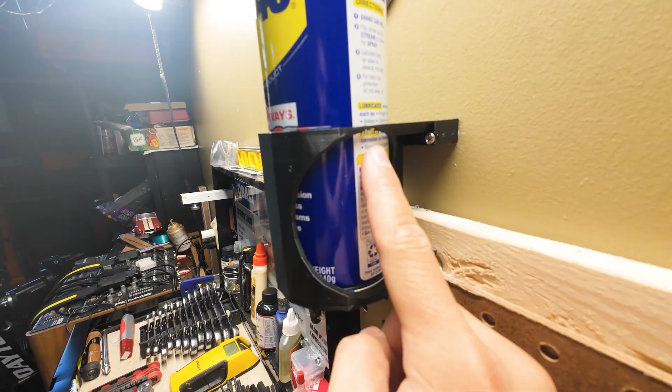Problem number one that I talked about in the last video: look at all this space taken up by all these bottles. So I made prototype one of a cup holder, but it's very thin, and I think it's going to break one day. Also these screws are too big for the holes. So I need to make the holes bigger, make this support bigger, and probably change the design. That's what we're going to do for prototype 2 of this cup holder to hold the other WD-40 bottle.

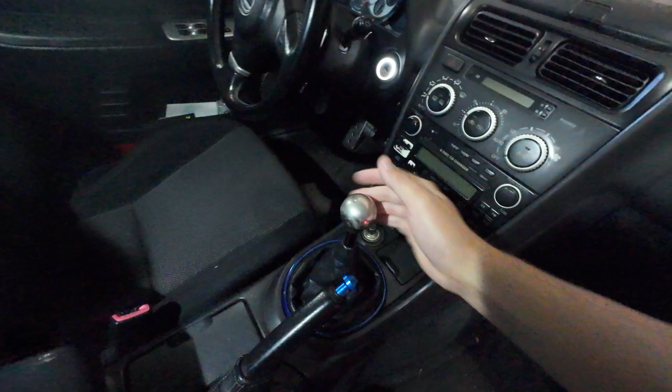And then I had an idea. This is a water bottle that's essentially a cup holder. What problem do I have on my car? If you don't know, when you're driving a manual car, having cups with straws right here is horrible when shifting - it gets in the way, hits your hand. So what if I could get that cup holder and put it right here? This would be ideal, this would be perfect.

I know some of y'all are saying, why don't you just put it on the vents? Those look stupid in my opinion. I want the vents blowing on me, not on water.

It just shakes around. So I was thinking, how can I design something that either hooks on top and holds it, or hooks on bottom? Option A, it hooks on top and goes in between that. But I don't like that idea because you'd have to change this part right here, like drill it or something.

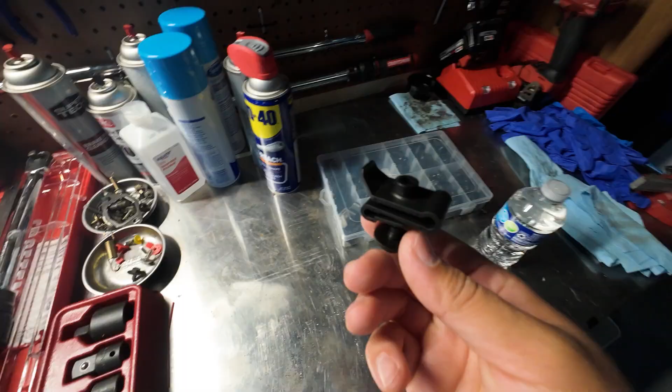So how about you hook something on the bottom, drill it, and then slide the cup holder on right here. If you don't know what this is, this goes in between the under panel and the bottom side of the bumper. This screw will sandwich these two things together and hold everything in place, okay?

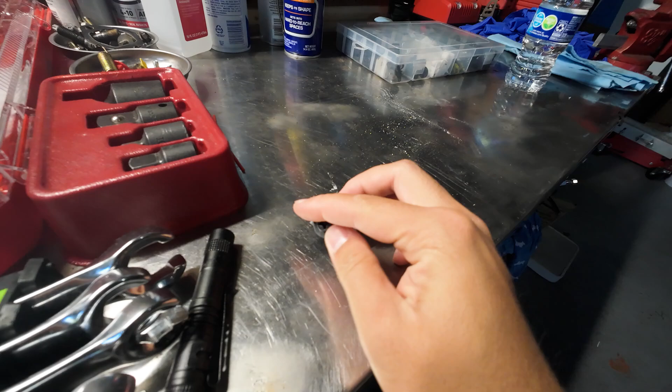So hear me out, let me fiddle with this. Let's go to the inside of the car. If I could somehow design something like this that goes underneath this right here and then screws in, and the cup holder can sit on top of it and lock in here, that would be perfect. Because then if I have a passenger, I could just slide the cup holder off.

Also, if you didn't know, IS300s come with 4 cup holders. In the back there's also another 2. So if this prototype cup holder for my car version 1 fails, I always have 2 cup holders in the way and 2 cup holders in the back that do the trick. That do the trick? That do the trick. I don't know, English is hard.

All right, let's go upstairs and let's CAD up some cup holders.

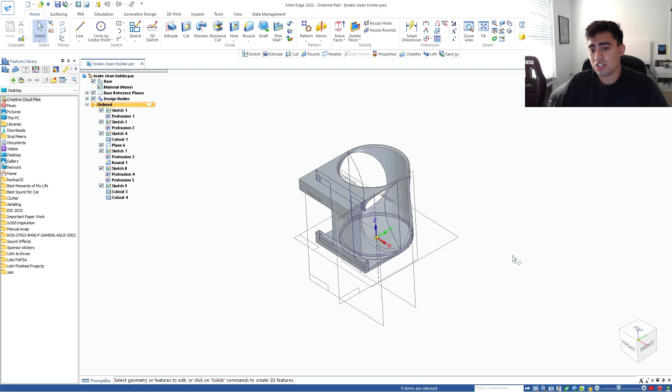All right, so we're back on CAD. All the measurements are still there from the last time we designed this. I showed y'all a time lapse of me designing this, which wasn't the best - I thought I liked time lapses, but it didn't really show the process.

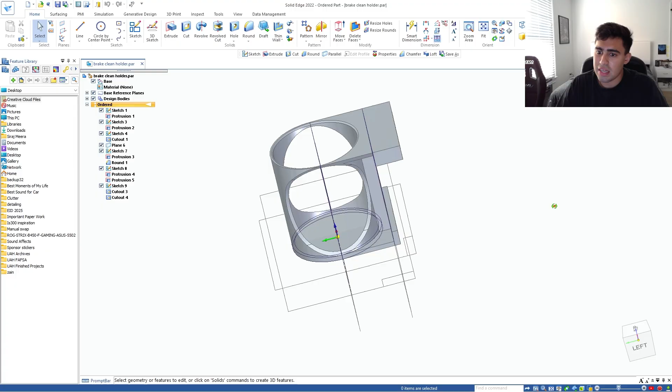So basically I started with a circle, extruded it into a basic cylinder, cut holes here, cut a hole straight through it, and then designed a backing plate right here. On this right side, that's where it attaches to the wall. I just extruded it until it meshed into the actual cylinder.

First step, let's fix this little wall thing. So what sketch is that? All right, let's adjust this sketch.

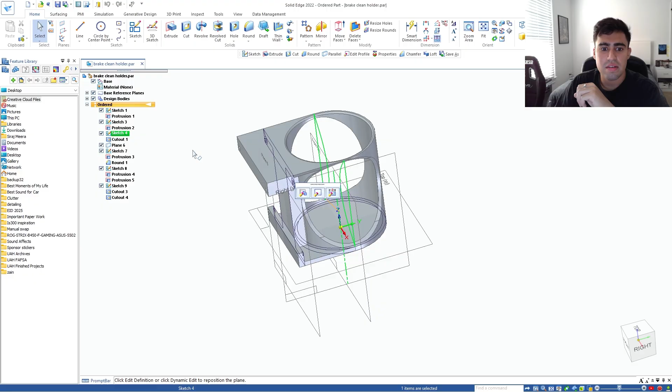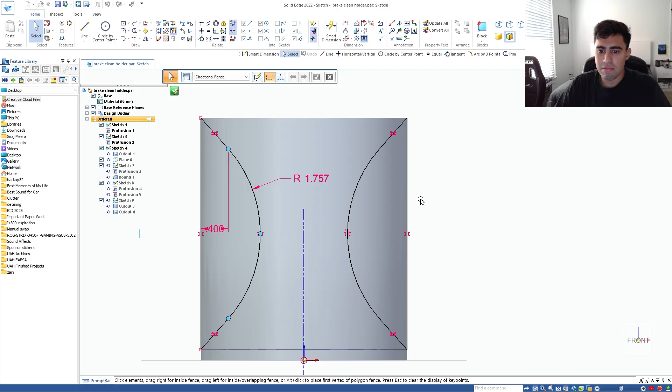Many of y'all probably haven't seen SolidWorks or Solid Edge, so I don't know what to tell you except I'm going to try to explain it to the best of my ability, and hopefully it's not as complicated anymore. CAD might seem very jarring, but it's just drawing, and then drawing in 3D.

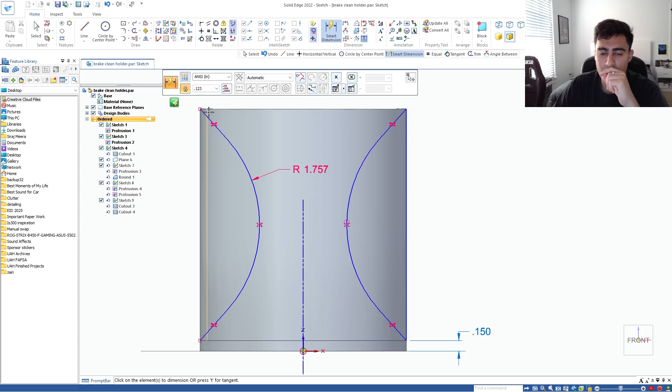Let's delete this and then measure from here to here. That's 0.15. Therefore, I want this and this to be the same width, if that makes sense. So I'm going to put this right here, and then right here, and do the distance to 0.15.

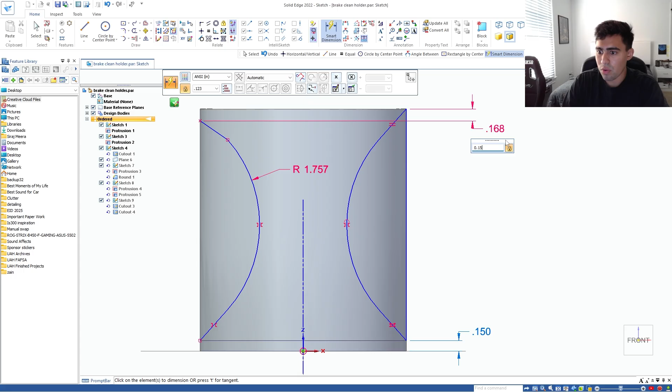Now I could time lapse this for you so you could see the entire thinking process and basically see what I'm doing, instead of seeing a camera behind a monitor that's overly bright. So yeah, let me time lapse this for y'all.

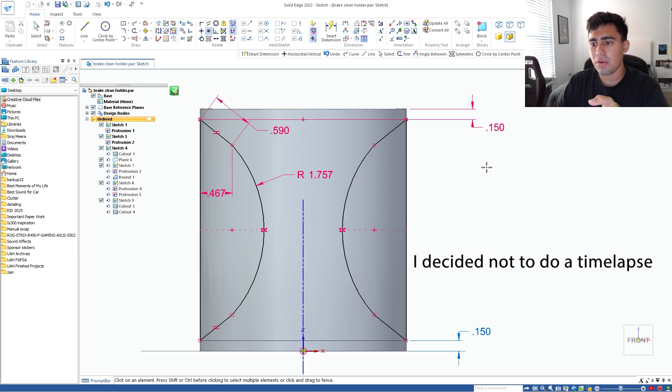All right, so that's basically it. Let's see if it adjusts the hole. It probably messed it up because I deleted some members, or not. So let's see.

Finish. Yep, protrusion number—ooh, it messes up everything, basically everything. So that's fine, you just delete this protrusion.

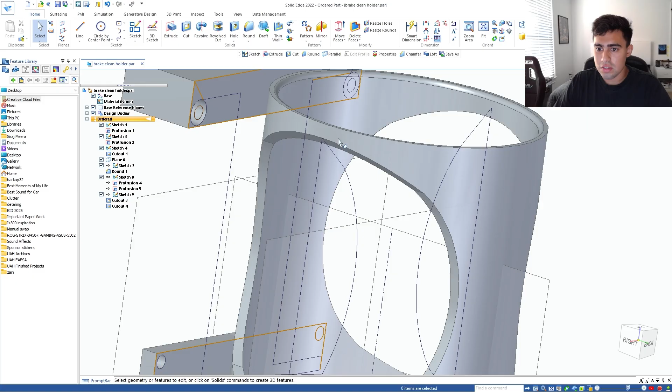And then the holes are a lot better, because look, you see this? This is thicker, this is thicker, all of these are thicker. So let me remove some planes for y'all so you can see it. If you can't tell, I'm from Alabama, I say y'all a bunch.

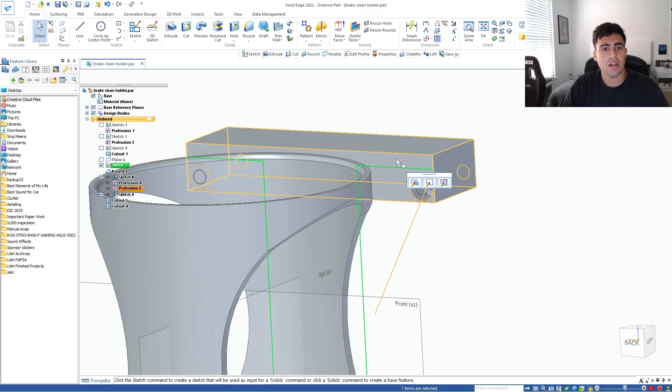As you can see, the green sketch is now both square, if that makes sense—like all these are squares. The last time it was like a triangle, it was just a weird structure that I made.

But now I'm gonna extrude this sketch this way. But I don't want it to go through, so I'm just gonna... through all, but that doesn't work. Through all? I don't think so.

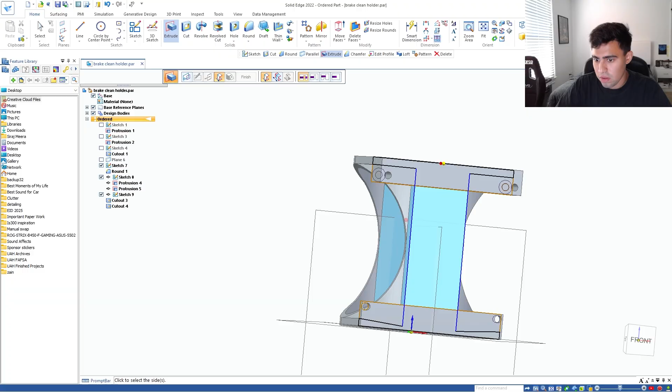Let's try this. There you go, look at that. Perfect, look at that, beautiful. Let me remove that sketch now. Beautiful, look how simple that is now.

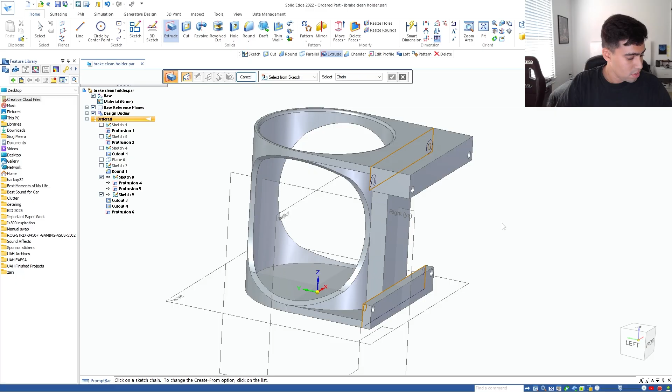All right, this print's going to take 4 hours, and it's already 5:14, so this video might come out late. But I also need to design the other one.

So the problem with the holes is that the holes were way too tiny. So I'm going to cancel this sketch. Extrude.

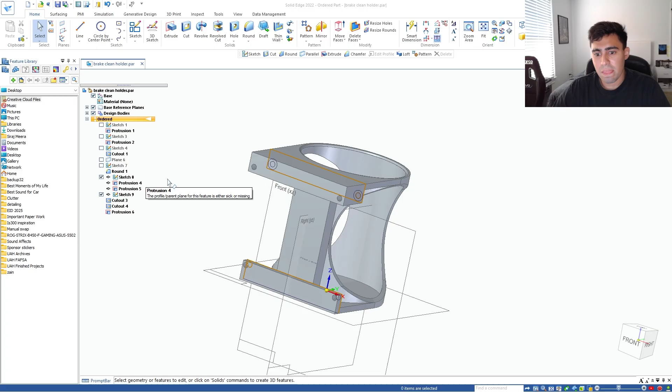You know, I don't remember the measurements, to be honest. I'm going to adjust the sketch first. For some reason I did it sideways. Whoa, happened there. All right.

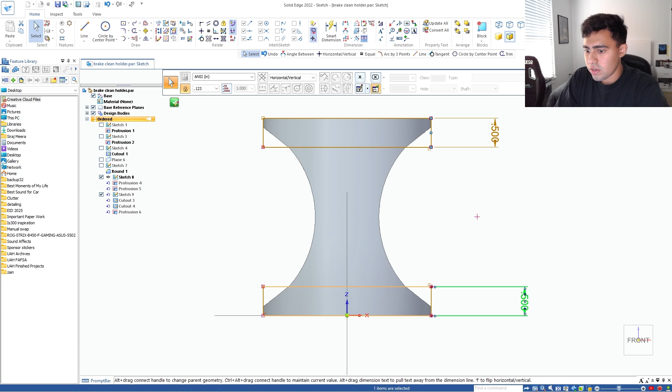So for some reason this is 0.5 inch, I'm going to do an inch. That didn't work, inch, hello? It does not want to do an inch. Let's delete this, and then it's 1.89, 0.189. I'm going to take a picture of that because I need to remember that.

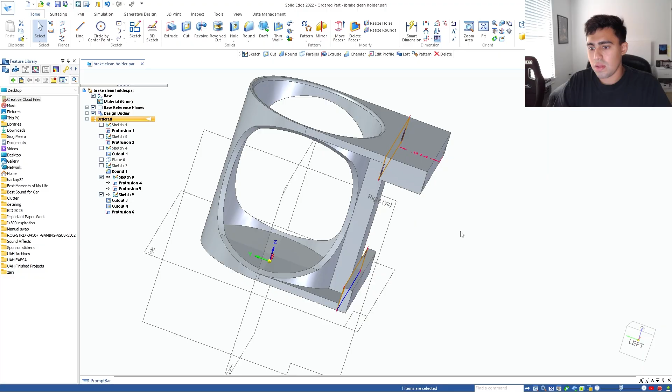And then what is this? Protrusion—the length of that, 0.914. All right, let's take a picture of that, so it fits flushly against the wall. I'm gonna try to figure this out and then I'll get back to y'all.

All right, so now I have these platforms a little bit bigger. I can make the holes a little bit bigger as well. So I don't actually remember what size the holes need to be.

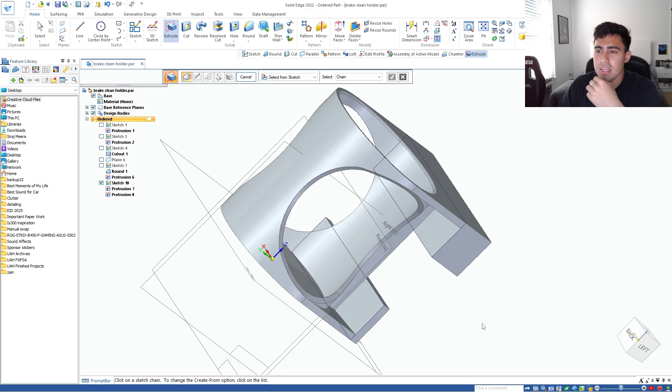I'm gonna get the screw real quick. Still have the screw, so let's measure this and measure the threads as well and then make the holes, and I'll be right back. And there we go.

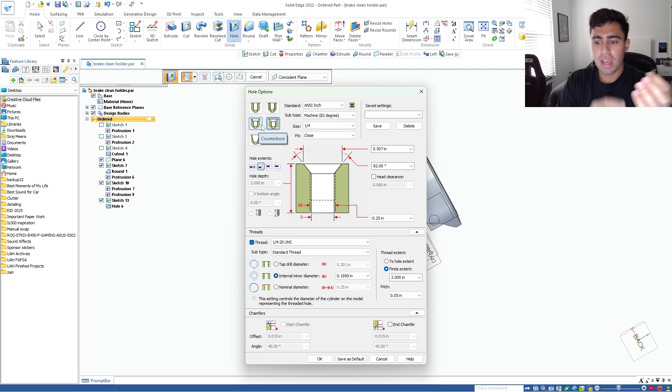I'm not sure if you saw how I made the holes, but there's a hole function, and when you click on it, there's a bunch of things you could change and exchange. Change and exchange? What am I saying, this isn't a shop. Anyway, you could change the angle of how the countersunk hole is, the diameter, and the thread diameter. You can make it threaded if you want, but for me, I'm not, just for simplicity's sake.

And I think we're done. So let's convert this to a... First of all, let's Control S, save it, and then let's save as translated, and then let's do V2, STL.

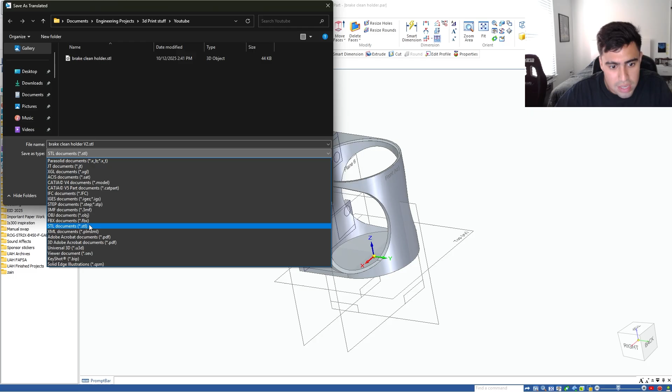We could do STL or a step. Let's do a step this time because last time the STL was a little wonky. So let's do this, and then I'll see you in Bambu Lab where we could actually print it.

So it's asking me about linear deflection and higher quality transformations, increasing processing time. Let's bump this up to like 0.010, and then let's bump this up to like 0.60, just this up 10 and this up 10 as well.

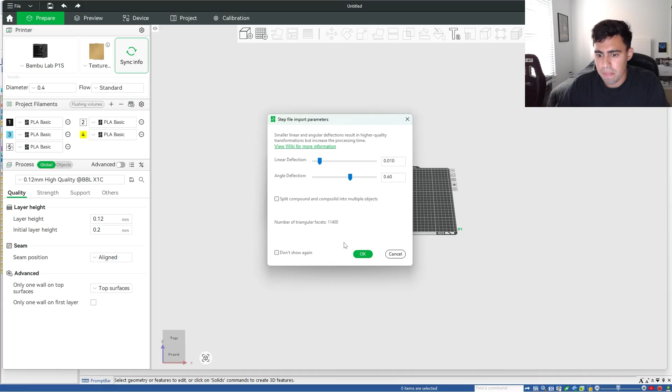Okay, oh wow, that honestly looks a lot smoother than last time. Whoa, okay, this is gonna be a good print. I don't know how long it's gonna take, but let's slice a plate.

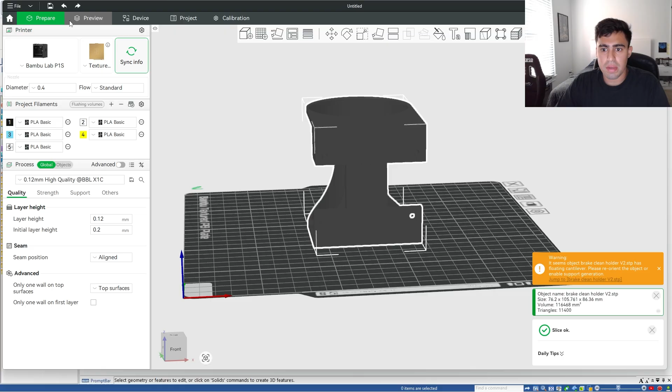And okay, it says it has a floating cantilever, so let's see if I could go back to prepare and then turn it over. So which way would be the best? Honestly, let's turn it over like this.

180, does that work? Yeah, let's try that. Let's try doing it upside down. That might actually help—I don't know actually, because the bottom's really flat.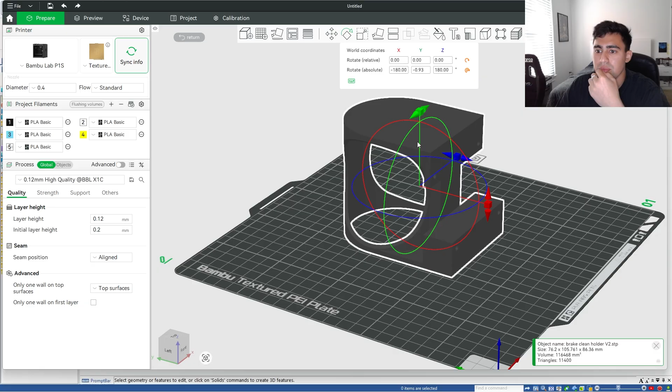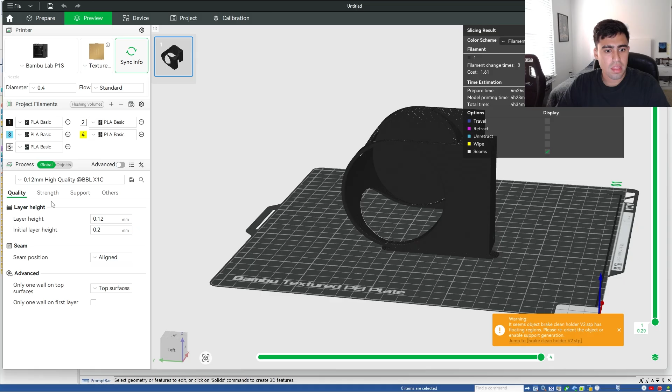Maybe if I do it on the side. Yeah, I think that's the best way. Let's see what happens if it needs any supports, because I wanna choose one that has the least supports. So support, enable support, slice again. Let's see.

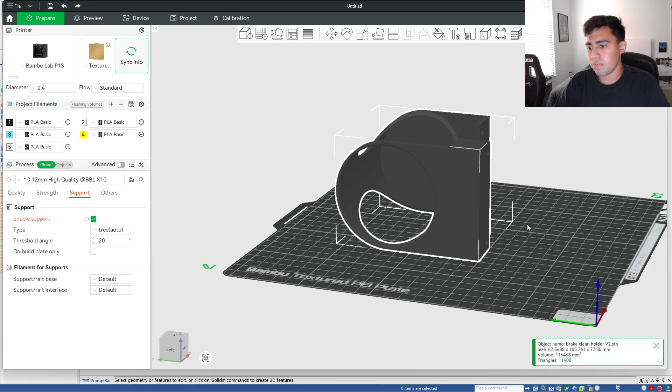Okay, not bad. Not a bad amount of supports. 5 hours. Let's try to make this the least amount of hours as possible. So let's rotate it again. That's not what I wanted. There you go, that's flat.

Let's slice the plate. Does it say I need supports? I think so. 5 hours is a long time.

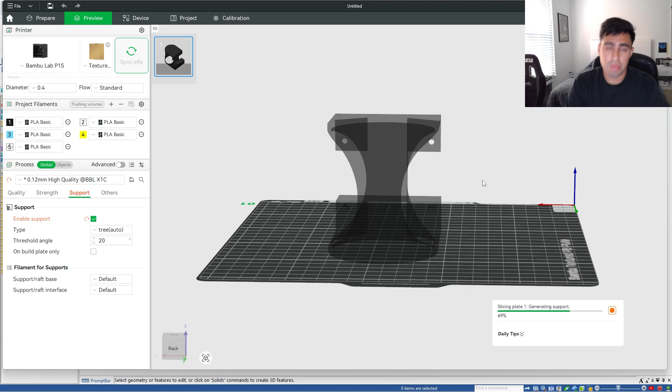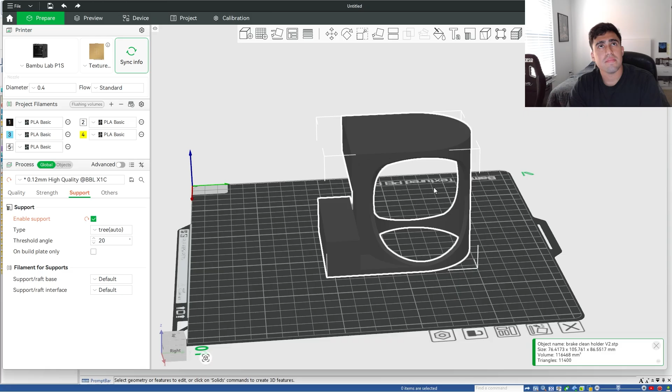I might show y'all how... 7 hours? No, let's go back. Anyway, I might show y'all my thought process on how to redesign this for the cup holder in the car, but I don't think I could print it in time, to be honest. Unfortunately, I was a little too busy this weekend.

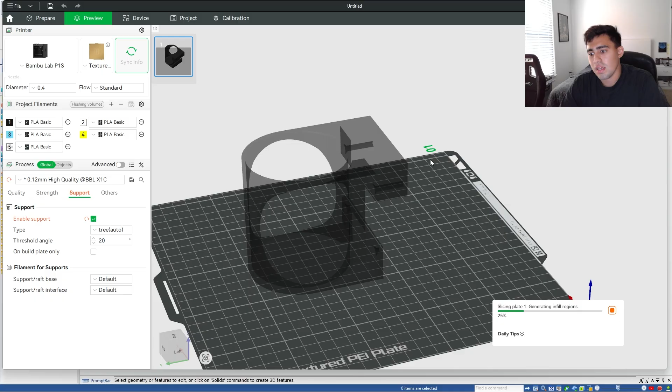So we'll have to save that cup holder for next weekend. All right, let's slice the plate again. Come on, give me like a 4 hour or 5 hour, I don't know. 5 hours. Dang. I mean, it is better quality.

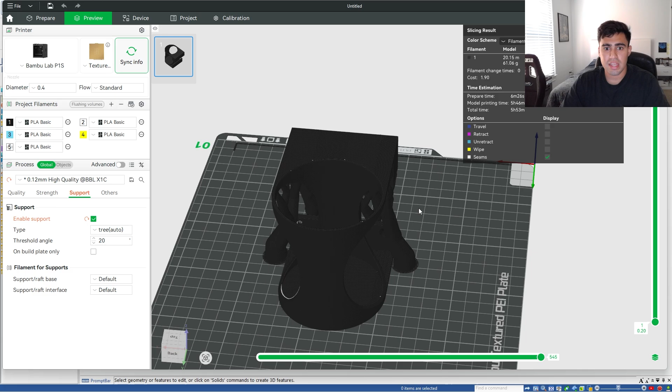So I'm gonna print it the same way we printed the last one, I guess. And yeah, let's send it to the printer. I'm not gonna do a printer time lapse this time, just because it was of low quality and it didn't look as good. So let's print this plate.

So I'm gonna turn on the time lapse so I can show y'all next time, or if not this time. And yeah, I'm sorry that I can't show you the final product in time. It's 5 o'clock, and 6 hours from now will be when I'm asleep, because I have school early in the morning. I just forgot that printers take a while to print.

So let's print this, send it off to the printer, and I'll time lapse it for y'all. In the meantime, I'll show y'all my thought process for the cup holder for the IS300. So let's get to the CAD program again.

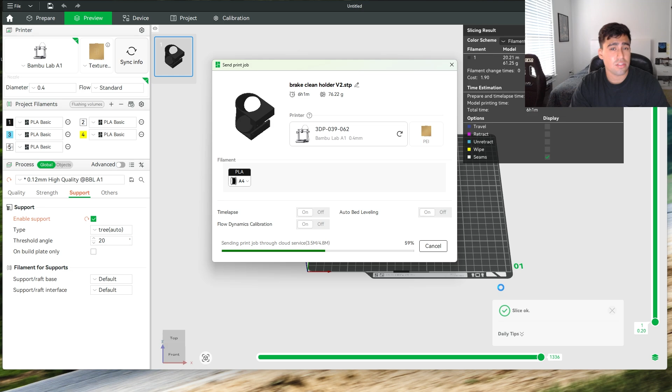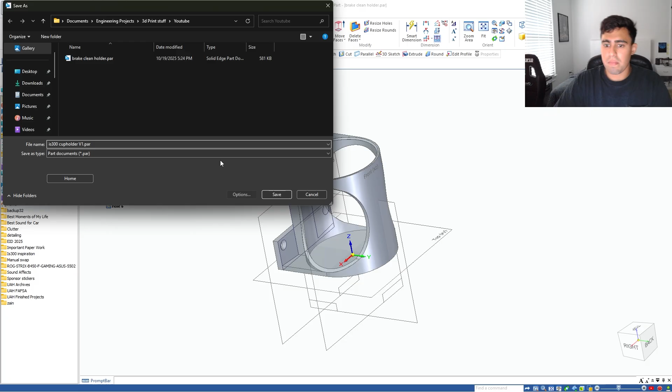All right, we're back in CAD. So I'm gonna save as again, and I'm gonna change it to IS300 cup holder V1. Save. So now this is free to mess with.

So I don't need holes like this. I don't need the sketch. I don't need this protrusion. I don't need that. And we could start off with this right here.

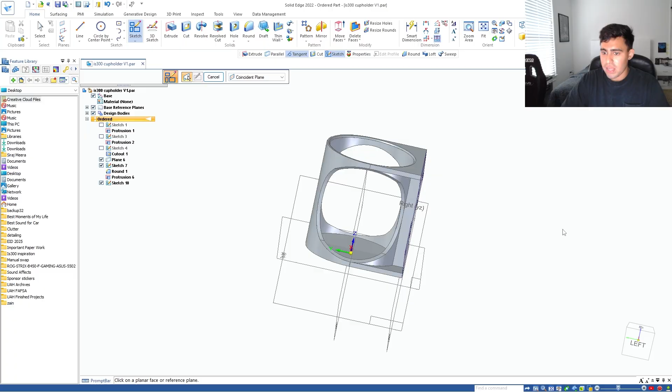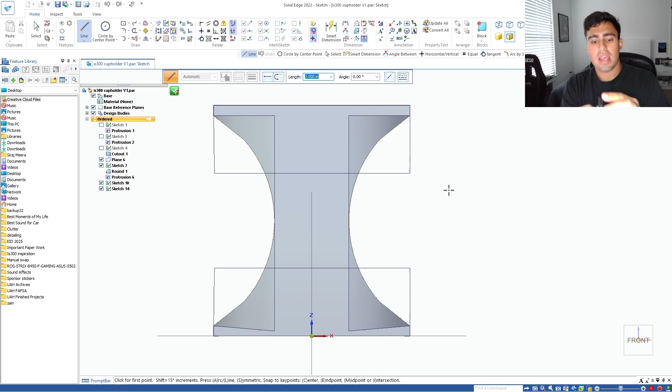So let's sketch on plane 6, which is basically this wall right here, and let's not reinvent the wheel. Let's use this, and I'm gonna cut off this side, and then let's add a mount that could mount onto this. So I'm gonna take some measurements of this, and add, I don't know how I'm gonna do it, because it's gonna fit onto the side of this like this, and then it's gonna need to somehow flip in like this.

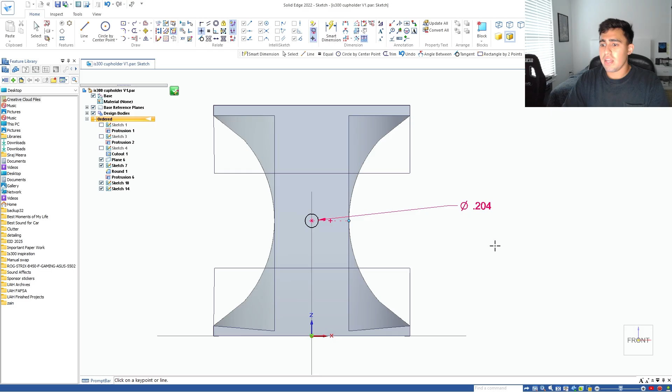Yeah, all right, let's start with the hole though. Now that we have our hole right here, we could adjust everything else accordingly to that. So I'm gonna start with a rectangle that goes around the hole and match this width and height, and then probably add a mount for this thing right here.

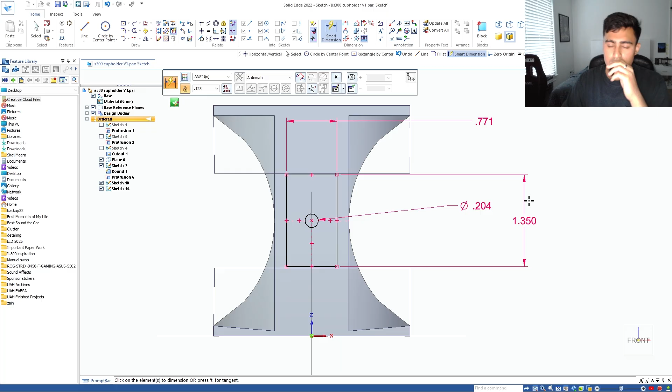So what I'm thinking about is, of course, making the hole so you could screw it in, but firstly, let's make the hole first, just to make it easier. So just cut, I'm gonna do that first.

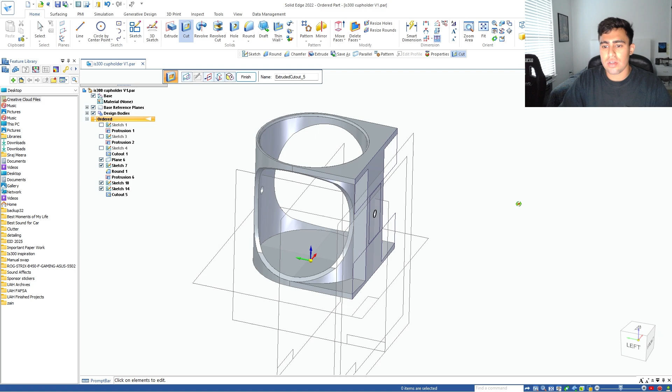It looks a little goofy, but keep in mind this is version 1. I'm gonna extrude this right here like this. I should have made a hole both sides, but anyway, I'm gonna extrude it to a certain length first. I'm just gonna do 0.309.

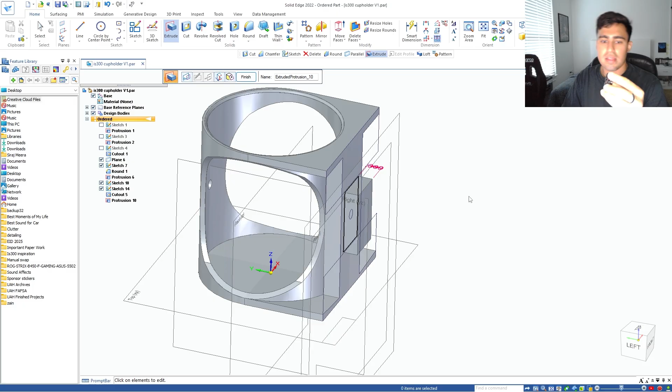309. I'm gonna do that, and then I'm going to make a little divot where it'll just click in, if that makes sense. So let's see, this is 1.02. So let me sketch again on this.

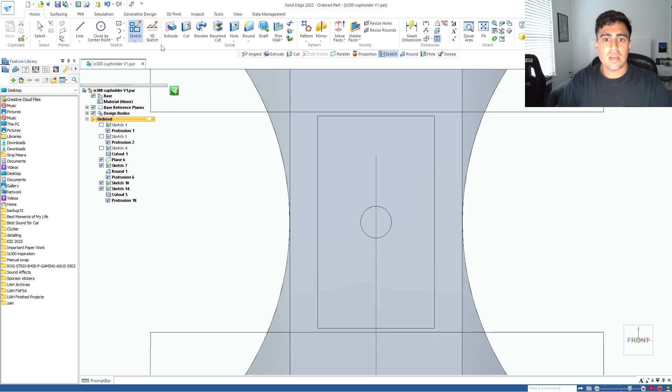Another rectangle. So rectangle by 2 points. And I already forgot which one it was. Let's measure it again. Yeah, I need to make this wider so it could click in, if that makes sense.

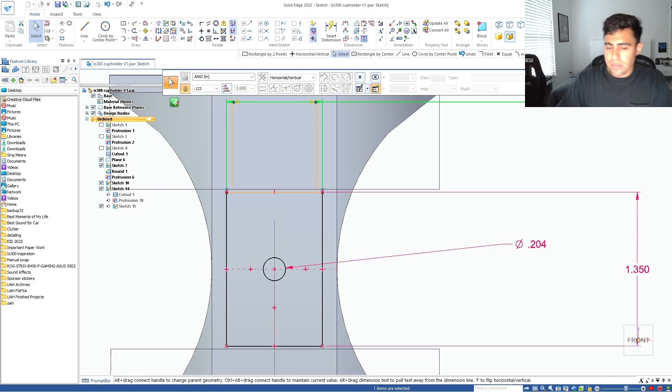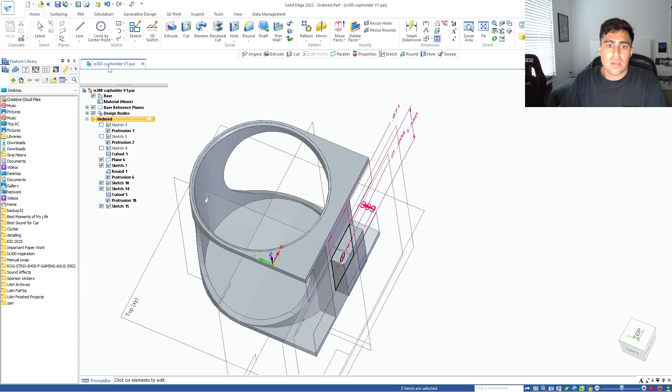I don't know, yeah, so that's 0.771. I'm gonna do 0.871. That gives me a 0.05 tolerance on each side. So this protrusion was 0.309, was it? Can't remember. Yeah, 0.309. So in the middle, I'm gonna, yeah, so. Sorry, I'm just thinking out loud.

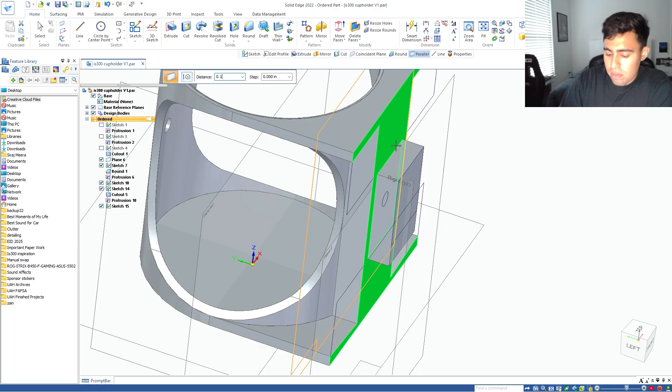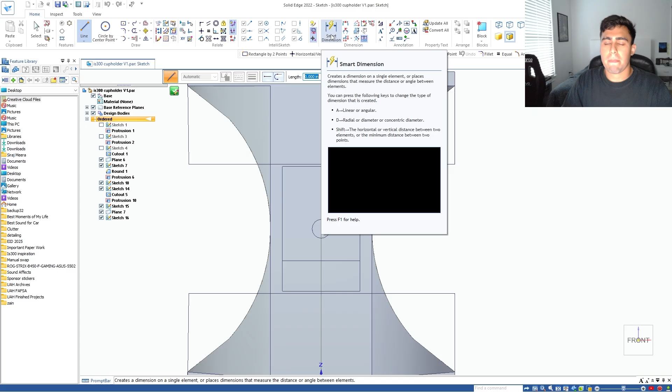0.309 divided by 2 is 0.154. So let's do 0.155. Let's sketch on that plane and make a rectangle. So just a simple test.

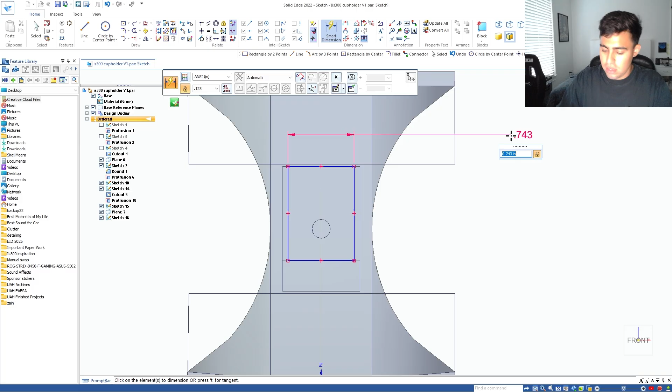Since the width should be 0.7677, I'm gonna go to 0.75, a little bit of tolerance. This is all experimentation, so I'm trying to make this quick and easy. And then it's gonna go down 1.022, so I'm gonna put this right here. Oh, that's not what I meant, 1.02.

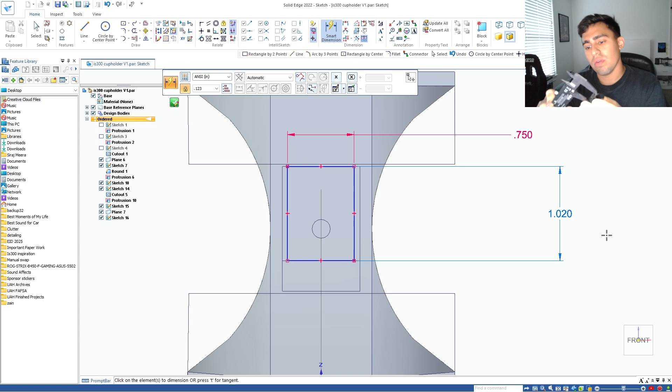It could be a little bit more than that, so I might delete this line. I made that sketch a little too small, but it'll work for right now. I could always improve it in the next version.

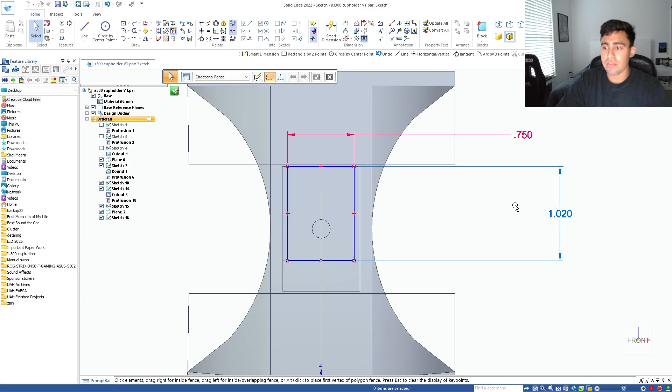Let's adjust this so it's constrained. If it's blue, it means it's not constrained, which means it can still move. There you go, now it's black, it's constrained. Close the sketch, finish it up.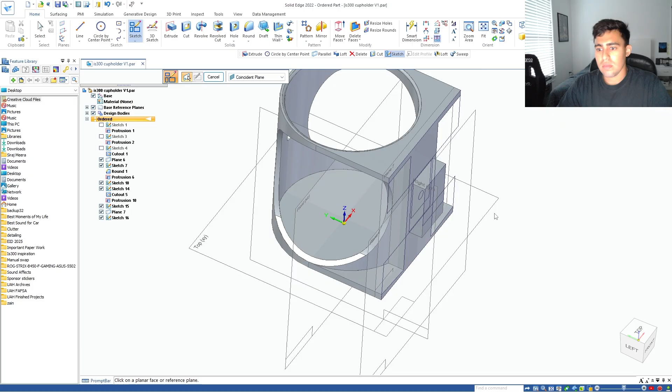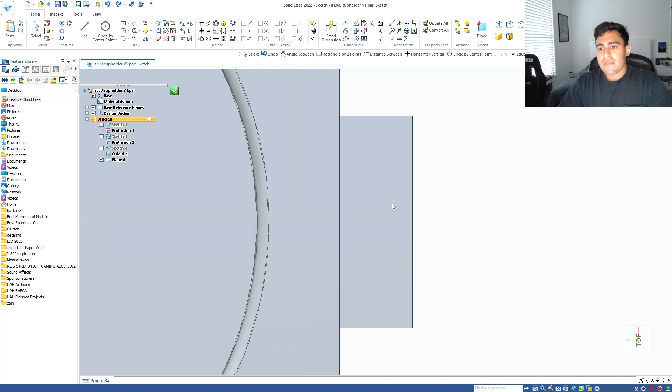Where'd that sketch go? Let's sketch on top of here and then make a rectangle. Okay, that makes sense. There's a little lip right there. I kind of want to use that, but this is just a prototype, so let's see how it works.

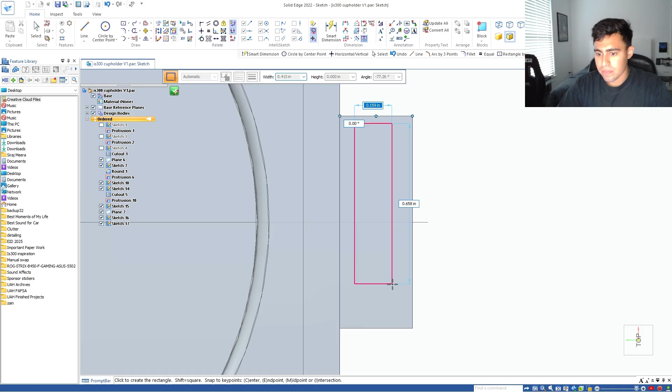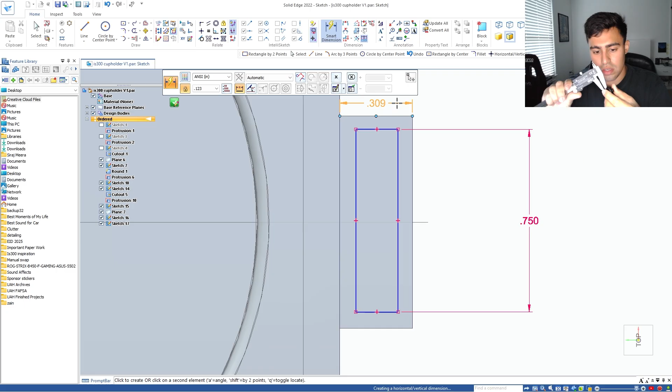Let's do this again for the third time, just trial and error. 0.77, so this is 0.75. How far do I want it? Since this thickness is 0.309, I'll put this at, let's see, 0.13, so I'm gonna put 0.14. Yeah, there we go.

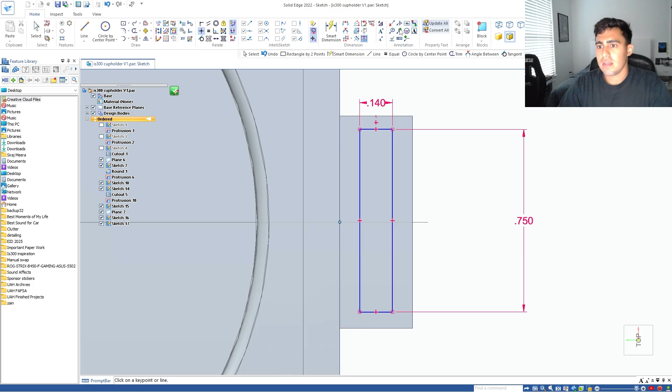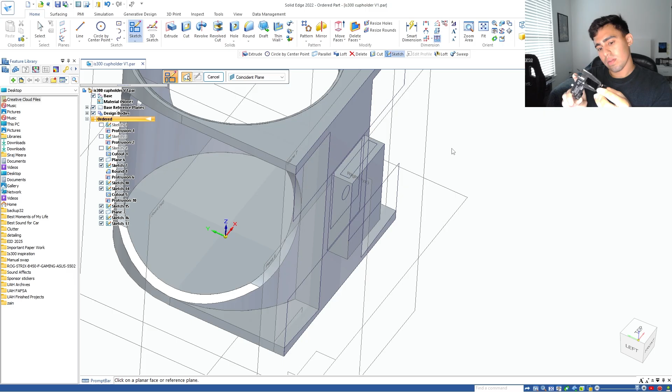And then I'm gonna center it like this. And now finally I can cut that, 0.11, basically 0.10. Let's do 0.104. Then I could cut this 0.104. That's not right.

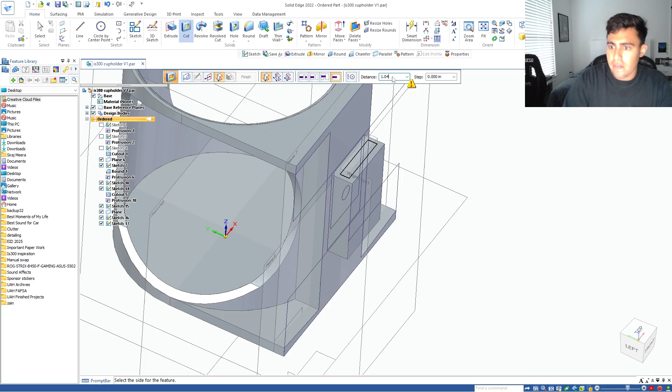0.1004 probably, that's what it was. Sorry, what am I saying? 1.04, god, I cannot think right now. There you go, and that should grab it.

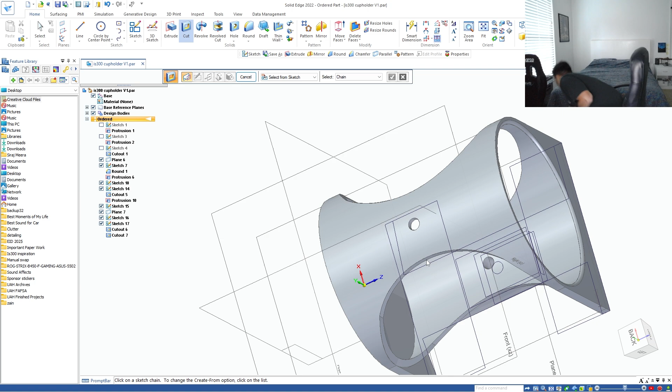I'm gonna cut this hole again, this way. And then I'm going to make this hole at the front bigger so a socket can fit in it. How wide is this socket? 0.56, so I'm gonna do 0.575.

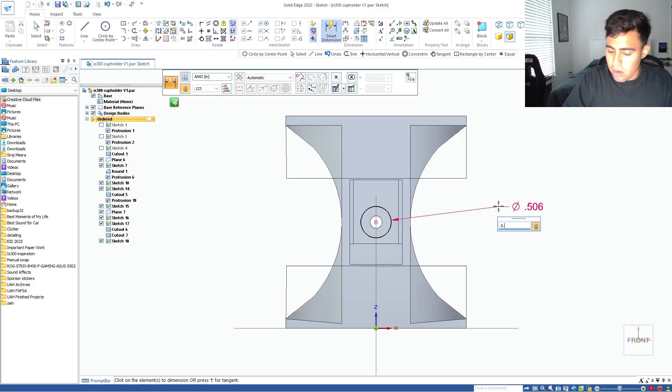So sketch, what did I say again? I forgot, 0.575 I think. Yeah, 0.575. You know what, there's a crude way of doing this. I could just get a parallel plane. Put it randomly right there.

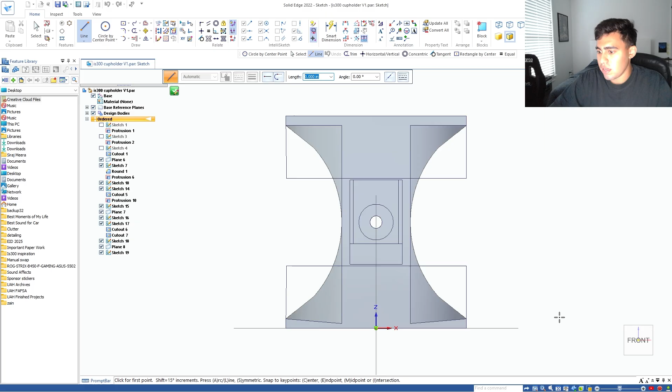Sketch on that plane. Basically, where'd that plane go? Okay, yeah, no, right here. Copy that circle, exactly like it's already constrained. And then all I have to do is cut this way. Bada bing, bada boom, done.

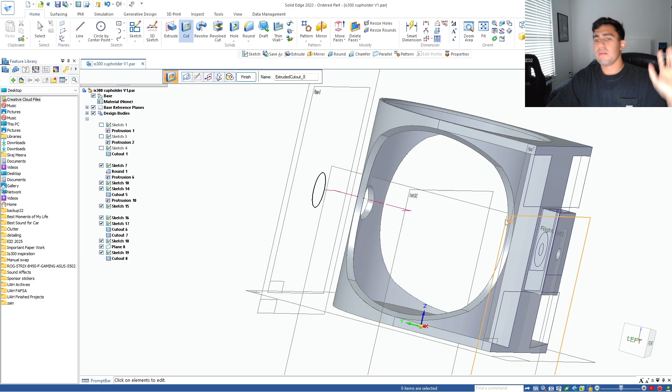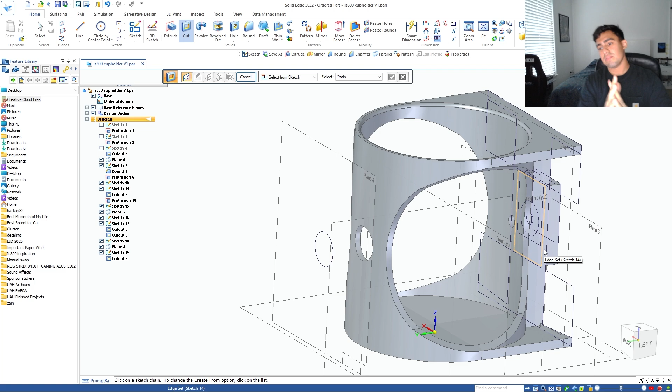There you go, that's prototype number 1 of the thing. So I could stick my socket in there with the 10 mil. I didn't really account for the actual screw itself to see if it's going to interfere with the water bottle, but I know the water bottle is significantly smaller than the brake clean bottle, so it'll fit. Whatever problems I have with this model, I could always change it later, because this is version 1, prototype 1. This should work for right now.

So this goes inside, and then I just hold this, push it up like this, and drill it in, and it holds it tight. And then it'll rotate maybe, but yeah, I could fix that next time.

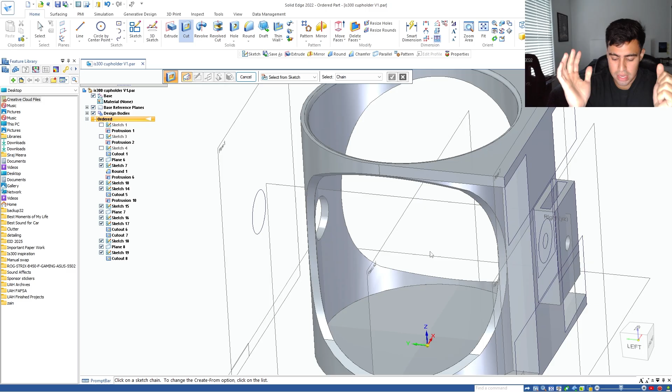Sorry for the video being just weird, because I'm just ranting on CAD, but I just want y'all to see my thought process when I'm solving problems and trying to figure out different approaches of making things I want to make in my garage or in my car.